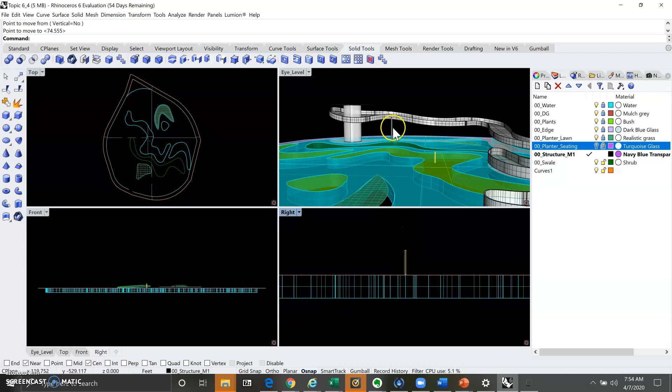Same with the other one that I created for a tree — it's 25 feet tall and doesn't look like it's snapped to the planting area, so we want to move it from the bottom up here.

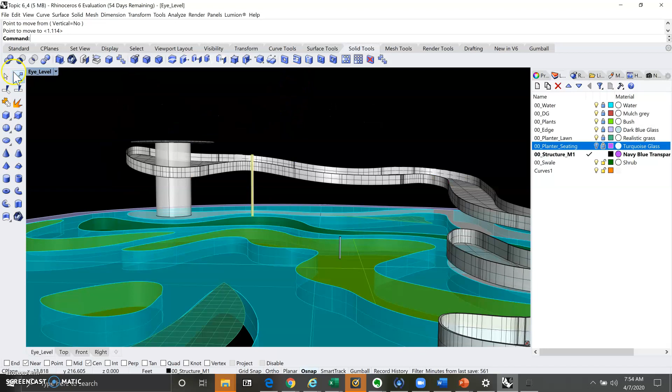Now we can go back to this eye level view, and just make sure that it's set to the right perspective view we've always had before. We saved it as eye level before, so let's go back to that saved view and make sure everything is turned on.

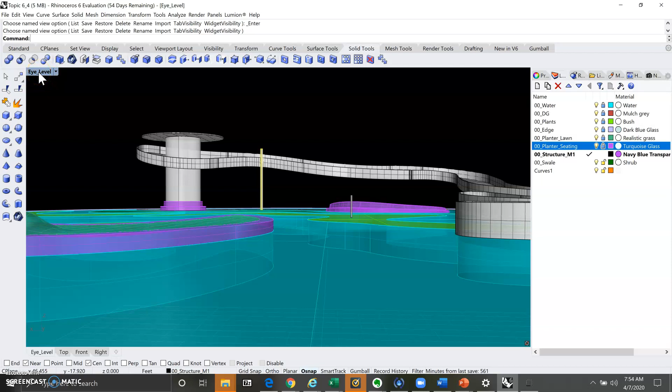Last time, in a separate video, we showed you guys how to set this technical view to be line work view, so now we have a line work setting right here.

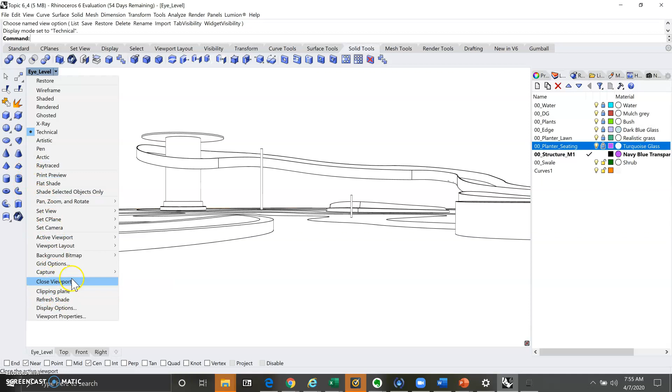What we want to do is go to capture down here and capture this to a file. Let's click on to file, and we don't need to check anything here. Resolution is up to you.

If you have a slow computer, you can make it lower, but right now 3200 by 2400 is pretty standard if you're using it as a line work base to create a perspective.

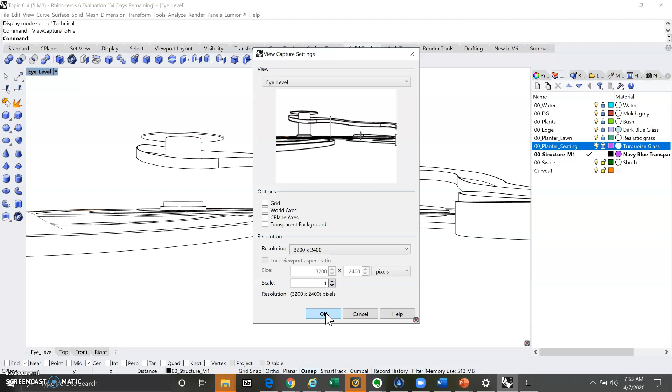Let's just say OK here. I already saved it as an image file, so I will save over, but you guys would just save it as whatever name you want to use for working purposes.

Yes. Okay, so I will see you guys in a separate video in Photoshop.